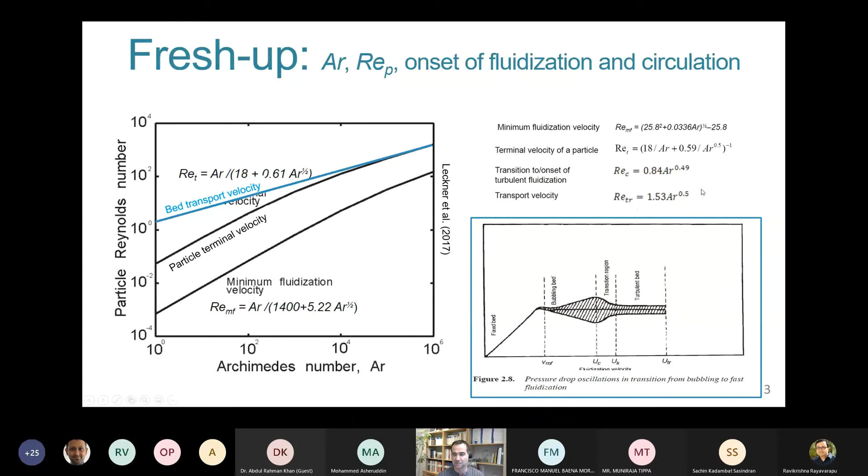Good. And then we come to what could be the holy script, so to say, of the fluidization regimes. This is typically the diagram that everybody refers to when it comes to fluidization regimes. It's popularly known as the Grace diagram. It was John Grace at British Columbia University who published this in 86. It is very widely used, and it has been replotted in many different ways. But the original one, if you go to the original paper, looks like this.

So I stick to the original, and it may look a bit chaotic with a lot of notes in the beginning, but I will walk you through it. What we have in the x-axis is the dimensionless particle size. And we went through this in the very first slides of lecture 3, if you remember. So this is the cubic root of the Archimedes number, and this is telling us the particle size in a dimensionless fashion.

Good. Then what we have in the y-axis is the dimensionless gas velocity, and that could be derived from the Reynolds particle number and the dimensionless particle size. And you have also that in some former slides. So it's velocity against size in a way. And then we have, when it comes to size, some divisions here. If you look, we have the Geldart groups. We also talked about that.

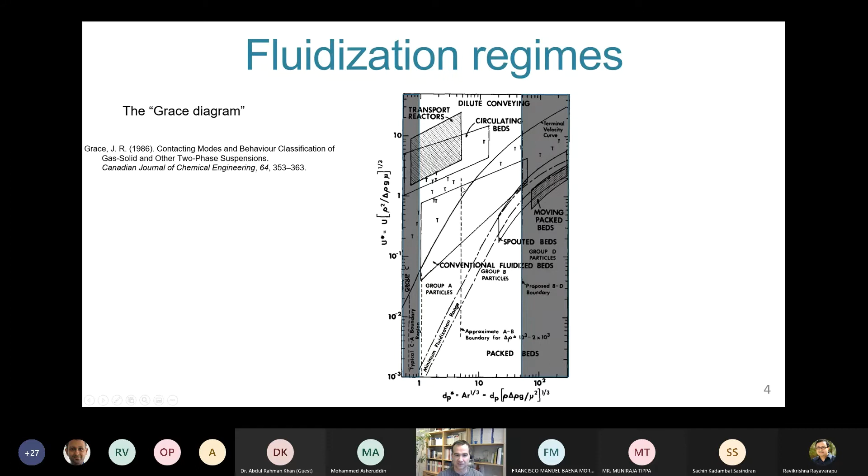Okay, so if we remove the zones that are not fluidized beds in themselves, the solids C and D that do not fluidize, then we get the central part of the figure. And then we have group A particles and group B particles, and we have the division line in here. Good. And then what you see is these curves that I had shown you before. So here goes the curve for minimum fluidization. You have the equation, and we derived it through a force balance in red, the minimum fluidization.

So below this line, we have a packed bed. You have it here, packed bed. Okay, then we have the particle terminal velocity here in blue, this force balance for a single particle. So in between these two, what we will have is a bubbling bed. So our bed will be fluidized, it will be bubbling, but it will not circulate. The circulation is given by the bed transport velocity, it's this green one.

And again, this is what I was explaining in the former slide, that for very fine particles, you have a difference between the terminal velocity and the transport velocity of the bed because of clustering of these group A particles. But when you come to group B particles, typical for fluidized bed combustion also, we are typically in this region of the size. This difference is negligible. So the bed transport velocity and the particle terminal velocity are very much alike. So as long as you keep in between this region, between these two, you have a bubbling bed. Then if you surpass these upper curves, then you enter the field of circulating beds.

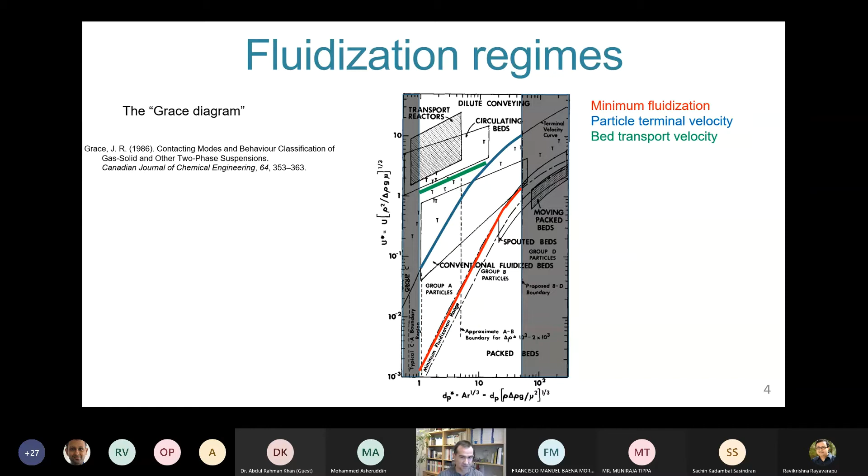So what I will show you now is modified from Grace and Bi 97. And this was, as I said, derived from narrow units, chemical CFB reactors with Geldart A solids. So I will walk you through a journey starting from very low velocities for these group A particles, and then just increasing gas velocity, but keeping the same size, Geldart A. So this is maybe a first note to make here, that what you typically read about fluidization regimes and the figures I will show you now originated from experience in these narrow reactors with group A particles.

And we start with minimum fluidization. Before the velocity reaches minimum fluidization velocity, we have a packed bed, and that is not fluidization. So fluidization starts here with UMF. A first note is that I will walk you through this journey going up in velocity, and the first significant velocity we meet is minimum fluidization velocity.

But I have to notice one thing, and it is that typically in fluidized bed units, solids have a particle size distribution. It can be more or less wide, but it's not a single size. And all these expressions that we derived are based on a particle size. You need one value for that. You cannot put a size distribution into those expressions. And we also discussed which representative mean particle size is convenient to use. It was this Sauter diameter, if you remember, which keeps the ratio of surface to volume constant.

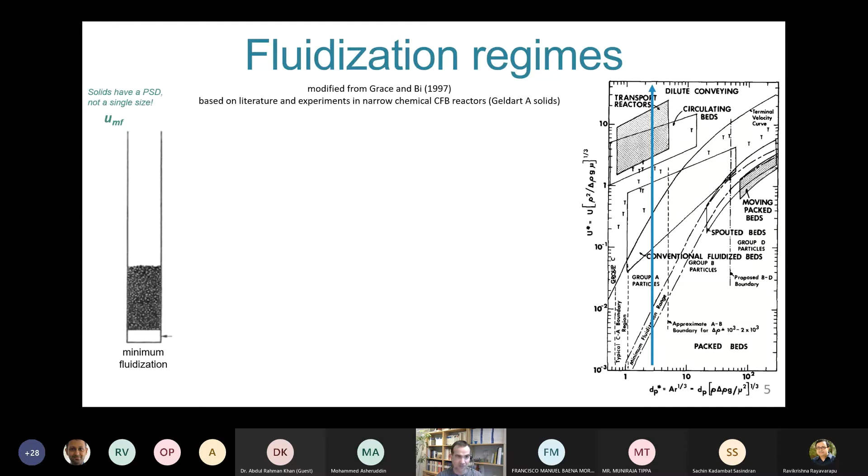Okay, if we increase velocity, we go from minimum fluidization. We are here in the diagram. We go from this minimum fluidization into these regimes. What happens with group A solids? Group A solids are particular in the sense that before the bubbling starts, you can increase velocity beyond minimum fluidization without having any bubbling. So the bed will expand, it will behave as a liquid, as a fluidized bed. It will have the properties of a fluidized bed, but you will not see any bubbles. And this is called delayed bubbling.

And this is called the minimum bubbling velocity here. Then you reach a minimum bubbling velocity in which you start actually seeing some bubbles. And this is what we see here. You enter this area of bubbling fluidized bed. You have bubbling here. So this is typical for group A solids, that before you see bubbles, you have minimum fluidization, you have a range of velocities in which the bed is fluidized, the bed expands, but it doesn't show any bubbling. Then you get this bubbling regime, minimum bubbling fluidization velocity.

If you increase this for narrow reactors, one thing can happen, and it's that you reach slugs. This means that bubbles grow much and they can occupy, if not all, most of the cross section of the vessel. And this leads to slugging, and we discussed slugging shortly in the former lecture. And this happens when the aspect ratio of the bed is typically larger than 1. Okay, finally we get to some transition to the turbulent regime.

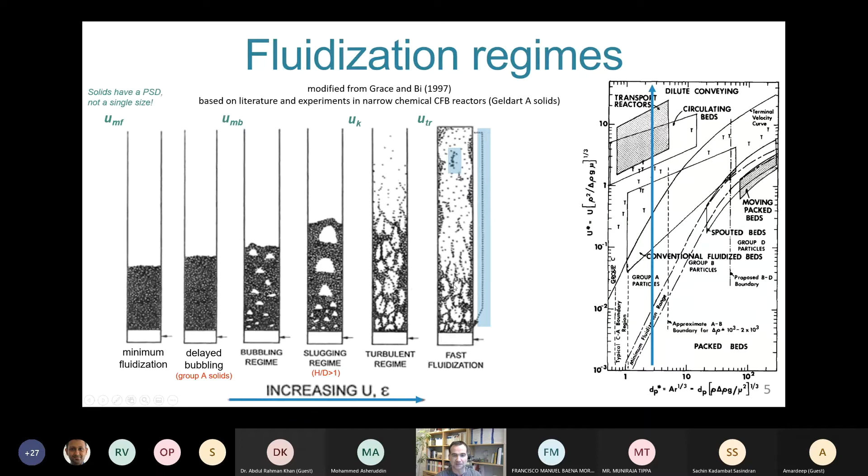It's like you have in birds flying in the sky, or like you have in professional cycling when people get after each other, or motorcycling, in order to take profit of the wake from the one just in front of you. So they tend to group together and form clusters. They group together, they form these clusters, and in the end, these clusters are so heavy that by themselves they fall down again. So you have a lot of back mixing by cluster formation here. So this happens when you are above the transport velocity initially for a region.

If you keep increasing, then you will have a more dilute flow, and the particles will flow by themselves. So the concentration of the solids is so low here that the particles have a hard time finding each other and finding the wake of other particles. So the cluster formation is almost negligible here. What you have indeed is still back mixing. So all the solids lifting will not make it to the top because you have back mixing at the walls. You see some formations of solids at the walls. So the solids go up and disperse laterally in a chaotic fashion, random walk. And if they hit the wall, they will typically then fall down through the wall to the bottom and restart their rise. If they are lucky, then they will get to the top again and be externally recirculated through, again, a cyclone or some kind of solids recirculation device. And then we are up here in conveying, pneumatic conveying, dilute conveying.

So this is the typical picture, I would say, for Geldart A solids, and this is the one that you would find in any fluidization book, so to say. I just wanted to clarify a bit before we move on what characterizes each regime. So here we start having some bubbles. Next step, when you go over UK, this transition to turbulent regime, is that pressure fluctuations go down, and this is what you see here. You see UK, you have a transition here in which the pressure fluctuations go down, and then you enter the turbulent regime in which they stay constant with fluidization velocity at a relatively low level. So this is what you have here, turbulent regime. No circulation, but very moderate or decreased pressure fluctuations. And then here you have the transport regime, and here this diagram stops, but reality continues.

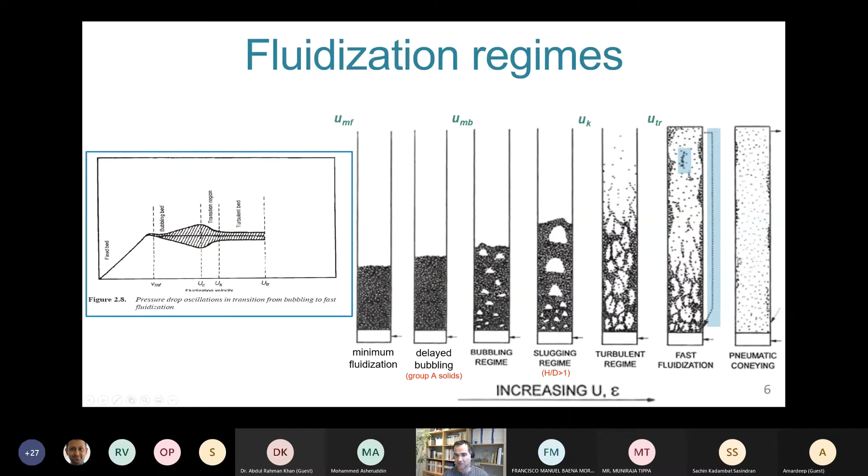And what we have is, again, in first place, some clustering, back mixing of solids dominated by clustering. They fall back because they cluster together. If you keep increasing, you have pneumatic conveying, no clustering, they fall back because they hit the wall. And there is a boundary layer for the gas in the wall, and they take profit of this low drag to fall back then. Okay, this is what you would find, as I said, in any book. And now let's see how we can tackle the question: can we apply this knowledge to CFB boilers, to CFB furnaces? This is a question that we should ask ourselves. In first place, we should look at the characteristics of CFB furnaces and these FCC units then.

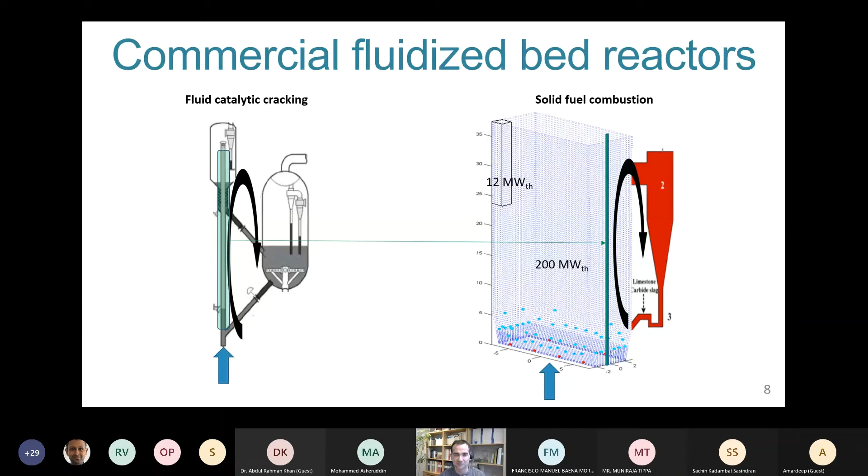I would say the answer is that maybe some things are applicable or exportable between the two types of units. Maybe some things are not. I guess that's the most reasonable answer you could give. Let's try to dive a bit more into the differences between these two units.

What has been observed is that for FCC units, you have a bottom bed. We were looking at bed expansion yesterday. So the bottom bed is the region which has a linear pressure drop, so to say, a constant pressure drop gradient. And this is only kept at low gas velocities for FCCs. As soon as you reach transport velocity, you don't have a bottom bed anymore. Your solids concentration starts decreasing from the very beginning. While in CFB boilers, we see a bottom bed, a region at the bottom of half a meter or so that keeps a constant solid concentration. So this is a first fundamental difference between both.

The second one is the size. Typically, the diameter of these risers is 30 to 50 centimeters, but you can see up to 1 meter. While for these furnaces, I gave you the dimensions before, about 100 square meters is not strange. So you can have something around 10 meters, which means that you will never reach slugging in these wide furnaces. They are so wide that the bubbles would never occupy the whole cross section.

Another fundamental difference is the particles. You have much finer particles in FCC. Group A is another Geldart group, while here we have Group B. Differences between Group A and Group B. Well, Group A has this delayed bubbling. There is a region in between minimum fluidization and minimum bubbling. So the bed is fluidized but doesn't show any bubbles.

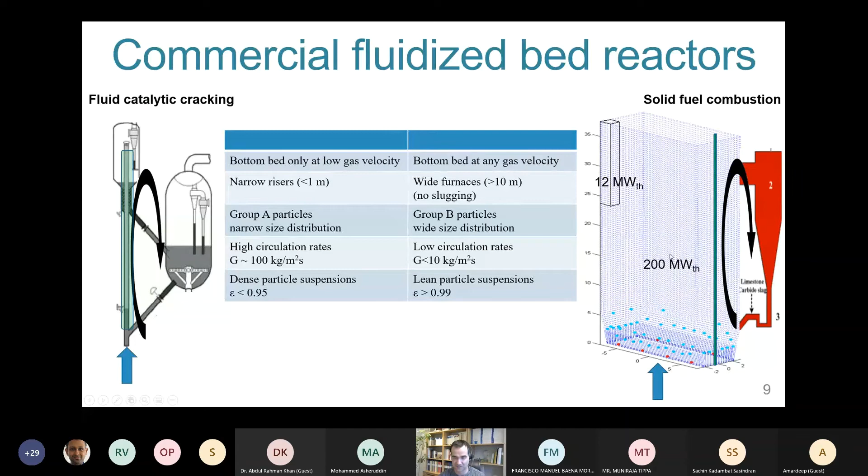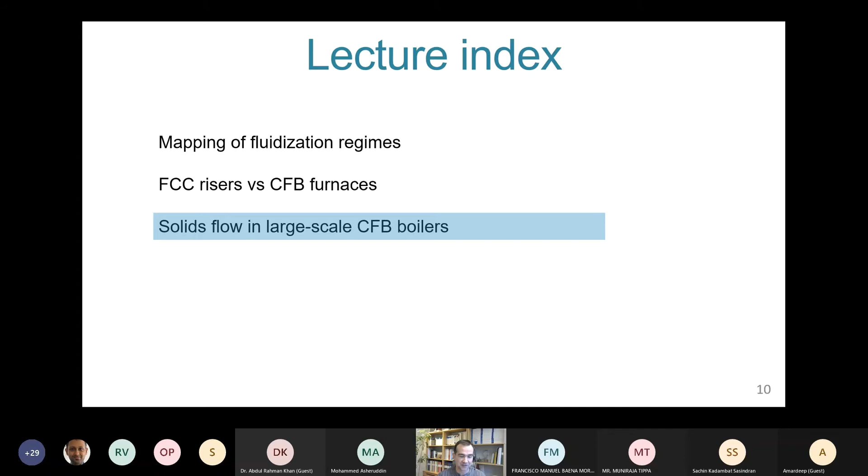And with this, I just want to illustrate again and make this question mark even bigger, so to say: are the learnings from FCCs relevant or exportable to large-scale combustors? And we will try to answer this now. And once more, I can't insist enough on this. Before answering, I just want to emphasize that the whole thing is a big question mark. So what I will tell now is not really proven or accepted or established, because it has not been investigated and there is a big lack of experimental data. And this is something that we are trying to tackle here at Chalmers in the next couple of years. I will tell you that in another lecture. We have a unit which we believe can help us much in investigating this kind of questions.

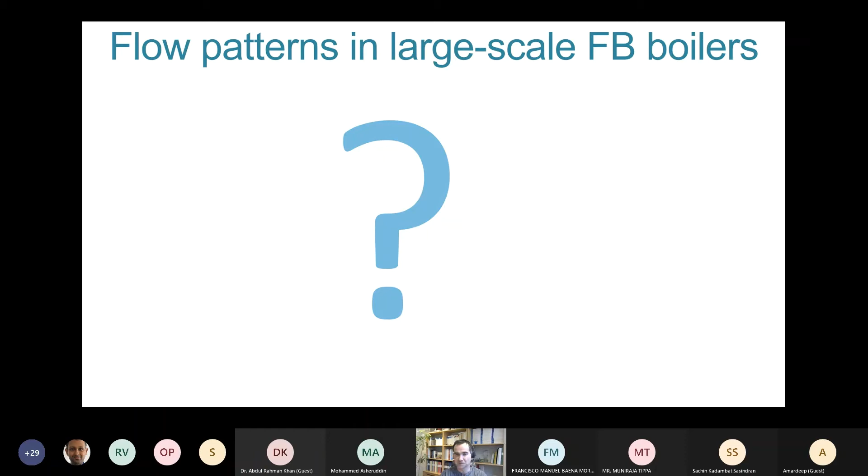Okay, so let's start then. Now, instead of rising velocity at a constant size with Group A particles, we will make the rise in velocity in the other region, in the region of Group B particles. And I will describe for you what we see. So first, now we're having Geldart B group particles. That is one characteristic for large-scale FB boilers. The other one is that the equivalent diameter or hydraulic diameter of these vessels, of these risers, is much larger than the height of the bed.

So we will not have slugging. So I have removed slugging from the former picture. I have also removed this delayed bubbling because it doesn't happen here. As soon as you reach fluidization, you will start to have bubbling. And this is something that you typically notice when doing experimental work with Group B particles. If you want to have minimum fluidization without any bubbling, it's very hard.

It goes from a fixed bed, and it's very hard to have a minimum fluidization bed without any bubbles. Bubbles would show up at once almost. So if you simply touch the bed a bit from the side, you just knock on the wall a bit, bubbles will appear. So it's hard to get minimum fluidization without getting bubbles. So at once you will have some bubbling regime in this bed when you increase velocity.

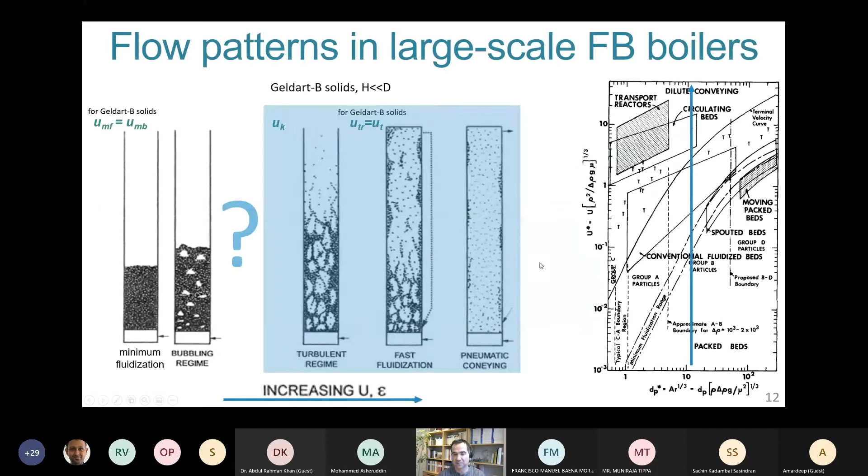Okay, let's try to see if this happens or not. As I said, data is very scarce on this because typically commercial units are not equipped with a lot of pressure taps, and you're not free to do experiments as you like in a 200 megawatt unit. But let's see if this happens. Would fluctuations in a bubbling bed at some point start to decrease again to enter this turbulent regime? Well, the data we have from the Chalmers boiler looks like this. And now let's have some patience here to explain this.

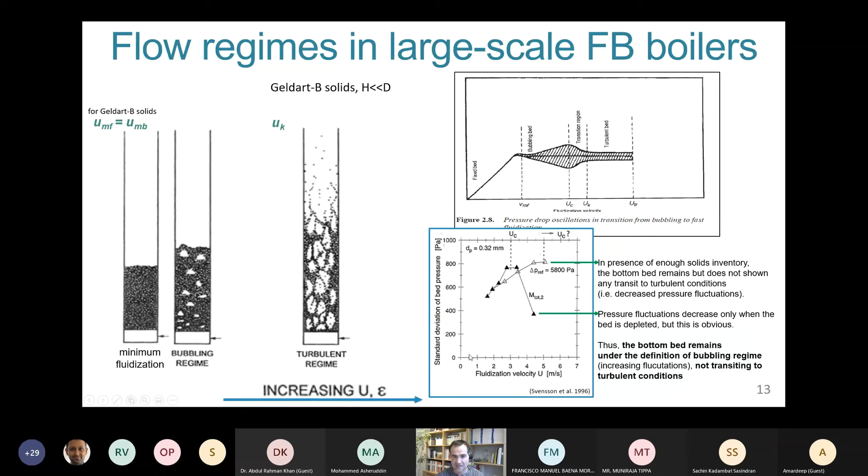You have the empty symbols. You have in the x-axis the fluidization velocity, so we are increasing velocity, and in the y-axis the standard deviation of the pressure, so pressure fluctuations. I just wanted to show this blue line here. So we have the transport velocity somewhere here. So we reach the transport velocity, we reach this point, and we don't see any decrease in fluctuations. So that is a first suspicious fact that we see that is not according to this typical picture.

Then we reach transport velocity, terminal velocity of the particles. We don't see any decrease in the fluctuations. Now let's follow the curve with the empty symbols. It starts here and it keeps increasing even after the circulation has started, and it never decreases even for the maximum fluidization velocity, 5.5 or so. We don't see a decrease. So if we are able to keep a dense bed in the bottom, we will see that the pressure fluctuations do not decrease. And we are far beyond this transport velocity. So this is a first observation.

Second observation is that, yes, if we do experiments in another way, with a constant mass of solids without caring about the solids inventory, we have the same mass and we just increase velocity, then we would see that at some point the pressure fluctuation decreases. But this is because we lose the bed. The bed is depleted. I was shortly telling you about this in the lecture yesterday, that as you increase velocity, more and more solids will populate the upper regions, and then you will deplete the dense bed. And in the end, you will have no dense bed. You will have no region with a constant solids concentration. And then, of course, you reach a decrease in fluctuations because your whole solids concentration is more dilute. So this is obvious.

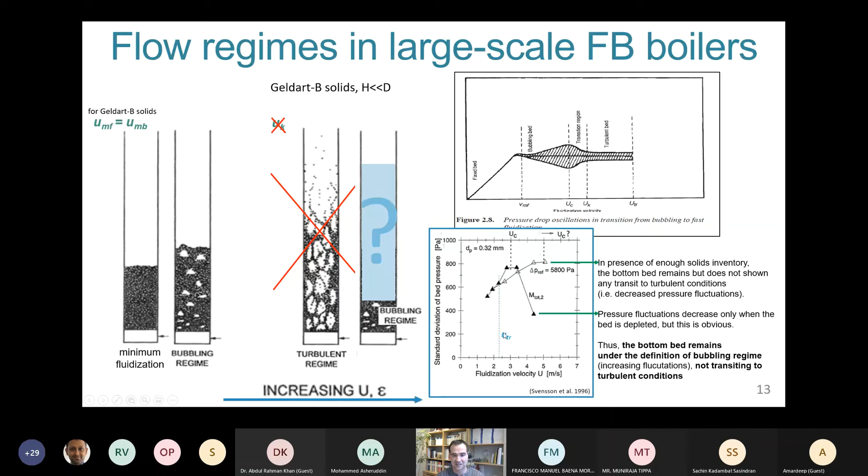Now the question is, what happens here? The material, of course, ejects after this transport velocity is reached, so we will have material here. How will it behave? This is what we try to answer here. Again, just to re-walk you through: we have minimum fluidization, minimum bubbling conditions here. As we reach the transport velocity, we keep the bubbling characteristics at the bottom, but we don't know what happens here. What will happen with the solids that have been ejected?

If we recall the classical literature, they say that when transport is established, where solid circulation is established, solids can have two regimes. One in which clustering dominates and the particles fall back by clustering and also by the walls, and the other one where there is no clustering and the solids back mixing is mainly by hitting the wall and then falling back again. So fast fluidization for the cluster dominated, pneumatic conveying if there is no clustering.

So what do we have here in our large scale CFB boilers? Again, very scarce knowledge, but we can go and have a look at what is there. These are measurements performed at Turów. This is a CFB boiler, one of the largest in the world, in Poland. And what we see here is an impact probe, a kind of momentum probe. You can point it upwards or downwards and measure how many hits of solids particles you get on your probe, so to say.

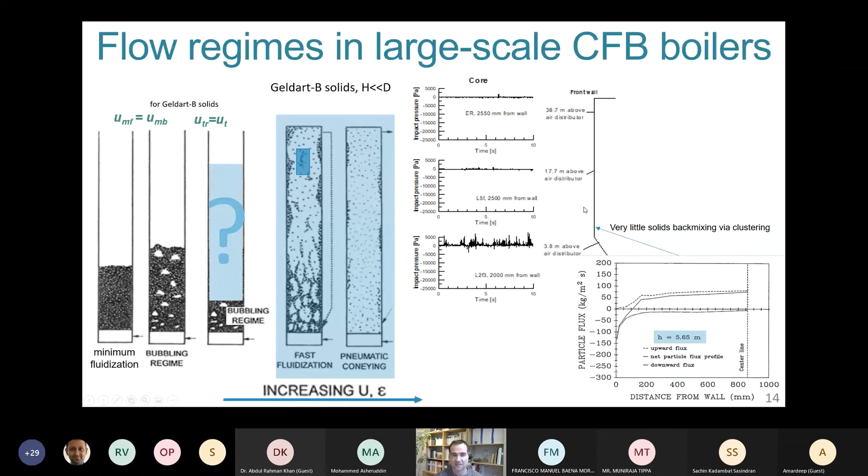And again, noticing that if clusters form and fall down, where you should gather them all, where you should see them all, is here at the bottom, and this is what you're measuring here. So here you are seeing all the clusters that are falling down from upper locations, and still not much. One conclusion from this is that there is very little solids back mixing via clustering. And this leads us to the hypothesis. This is nothing more than a hypothesis that I want to throw up in the air: that we have a bubbling regime in the bottom bed, in the bottom region, with constant solids concentration, but we don't see a decrease in pressure fluctuations, and that we see pneumatic conveying, or very little clustering, in the upper part by measurements.

And we know by visual observation, and because it's measuring, we have seen that there are clusters in some region just above the dense bed. There are a couple or 3 meters in which clustering is dominant. So our hypothesis here is that apparently in large-scale CFB boilers, you can find 3 different flow regimes

in different regions, but the 3 of them sharing the same unit, but in different places. So we have, again, bubbling regime here in the bottom bed, fast fluidization in the splash zone, and then we see pneumatic conveying in the transport zone, or at least very little clustering then. So this is what we see from dedicated experiments.

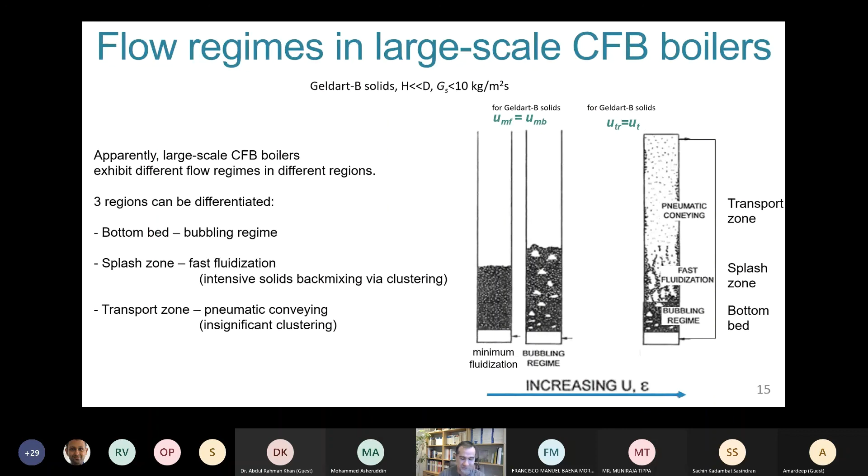This is only one hypothesis, and of course the scientific method tells you to support them by facts. And if we look at the solids concentration profile of a large-scale CFB boiler, this is the Chalmers boiler, but at cold conditions. So if we look at that, what we would see is a first region with constant solids concentration, and this is the bottom bed. As I said, this is not something you would see in FCC units, but we see it even for high velocities in CFB boilers.

So we see these, then we see another region with a certain solid concentration decay, and this is the splash zone. The solids concentration goes down rapidly. This means intensive solids back mixing, solids decay, and this is the one that we presume has to do with intensive clustering or clusters that are ejected from the dense bed and just simply fall down ballistically. We will look more into this in the next lecture.

And then we see a third zone with another back mixing rate. It's clearly differentiated from this intensive back mixing. Now the decay in solids occurs at a lower rate. And this is the transport zone, where the solids back mixing does not happen by this fallback of clusters, but rather by dispersed, single particles that hit the wall, join these wall layers of solids falling down. And this happens at another rate than the one we see at the splash zone.

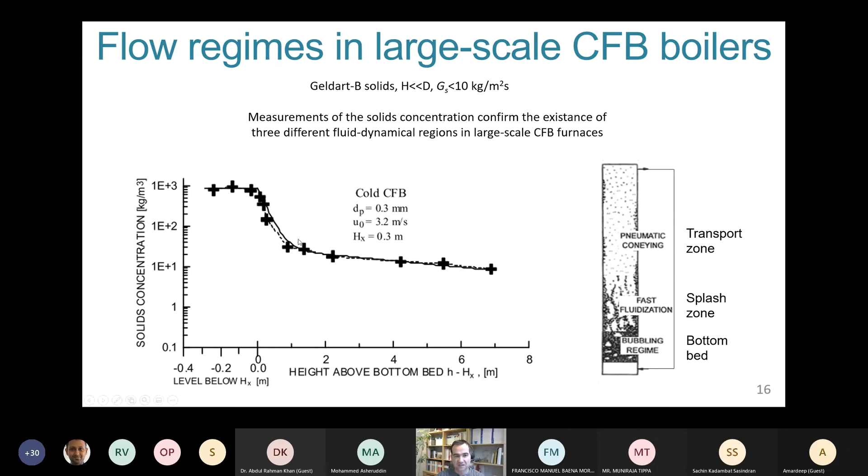our boilers. These typical solids concentration profiles are something that we have been working with, and trying to characterize and study in more detail. So the first region with a dense bed height, as we call it, constant solids concentration. Here you have it in logarithmic scale in the y-axis. You can see bubbles or jets, gas formations, so to say. And then you have an intensive back mixing here by clustering or by ballistic throws. And this is the splash zone characterized by a certain exponential decay.

The decay constant we call A. And above this splash zone, we have also an exponential decay. It looks like a line in a log scale, but at a more moderate rate. So the decay coefficient, we call it K. And again, this is a pattern that is repeated for different measurement campaigns in different large-scale CFB boilers, and that agrees with the hypothesis that I showed before. So this will link to the next lecture, this typical solids concentration profile. What happens in each of these regions? How does the solid flow look like in each of these regions?

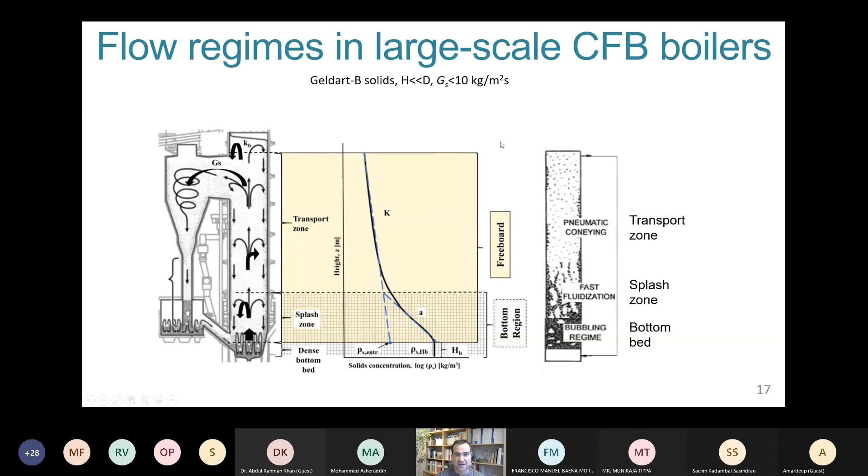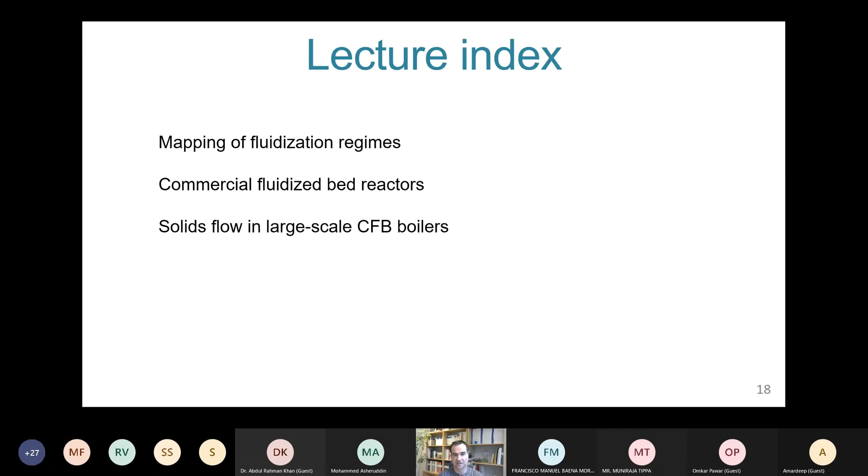This is for this lecture. We have gone through the mapping of the fluidization regimes, the classical mapping you see from books. Then we have looked at the differences in commercial fluidized bed reactors between FCCs and large-scale CFB boilers, and then we have formulated some hypotheses for large-scale CFB boilers, and seen that at least experiments seem to show that there are at least 3 different fluid dynamical regions in these units. More to come in the next lecture.